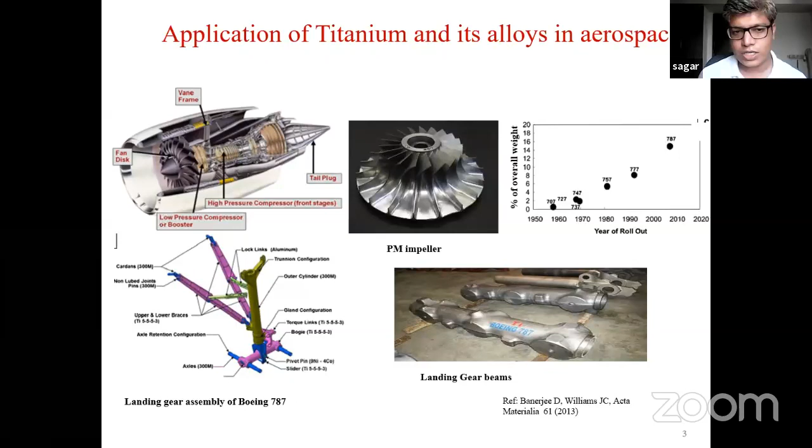Let's move ahead. We've seen why machining is important, so let's see its mechanism, especially in titanium machining, and why it's different from other metal machining. You must have heard about different kinds of chip formation in machining: continuous chips, discontinuous chips, and another category known as segmented chips. For many steel applications, segmented chips form when you subject the machining process to high speed cutting. Whereas for titanium, whether you cut at high speed or low speed, segmented chips will form.

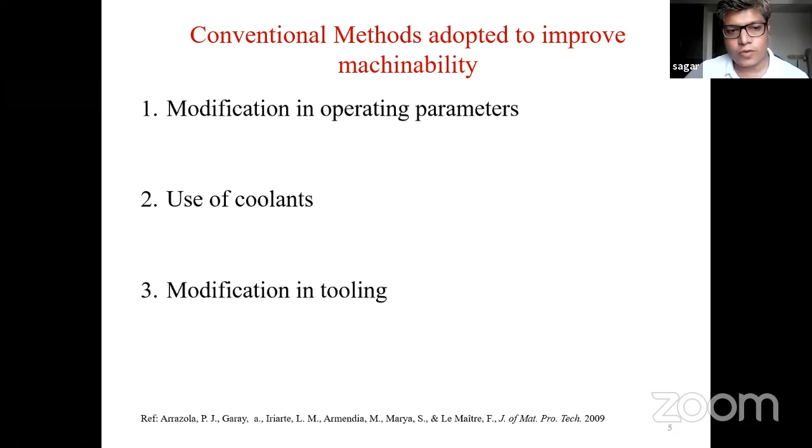So most of the times you could have seen in titanium machining, usually the cutting speeds are limited. We cannot go to the same cutting speed as aluminum or different kinds of steels, keeping apart the high strength steels. That is the main reason why titanium machining is difficult. So many people have tried to address this issue, like modifying the operating parameters, use of coolants, modifying the tool geometry, and all those things.

Modifying operating parameters such as cutting speed, feed, uncut chip thickness, that means the depth of cut, and coolants. So people have used solid lubricants, soluble lubricants, even liquid nitrogen. Then there's another conventional way...

Another conventional way to improve machinability is to use different tool materials and try different coatings. Tool materials could consist of carbide tools, and HSS is always there. Coatings are applied on the tool to make it more strengthened. Then there are changes in tool geometries, like you can give a chip breaker, different rake angles, different relief angles, and all those things. So these are the conventional ways people have tried over here.

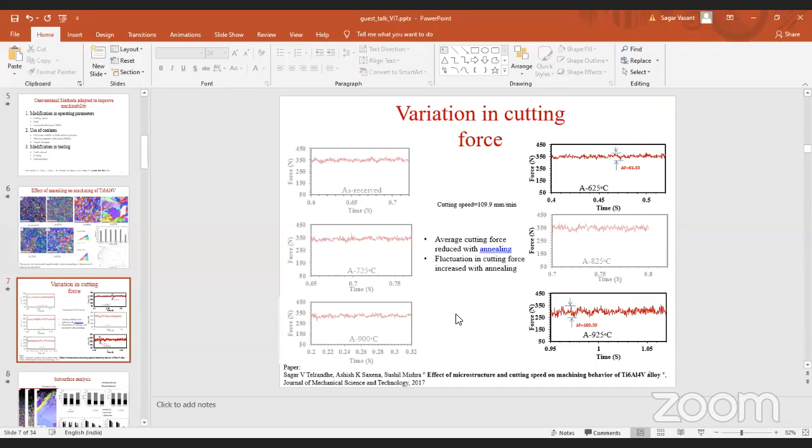Sagar, let us have the interactive session later. Let us see the presentation. Sure, this is how it is organized. Okay, fine, fine.

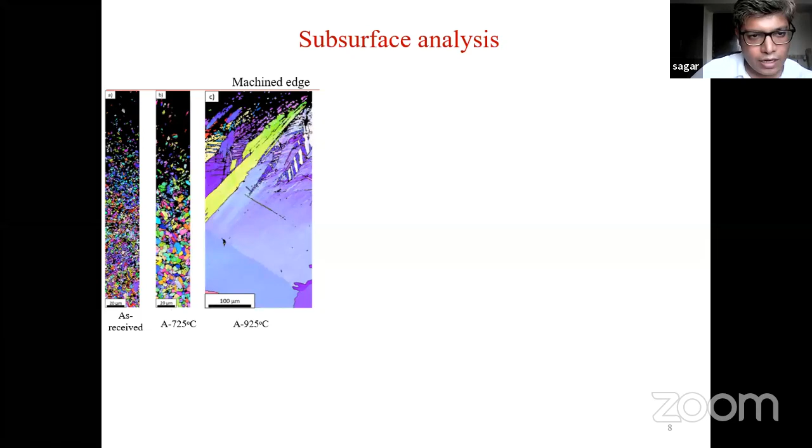So with as-received and at 725 degrees Celsius, we could not see much of those things because there is a highly distorted structure formed. But by this distorted structure, we could see how much is the machining affected zone, meaning due to machining, how much distortion happened at the subsurface level.

So at subsurface level, when you increase the grain size, the depth of machine penetration has been reduced for every cutting speed.

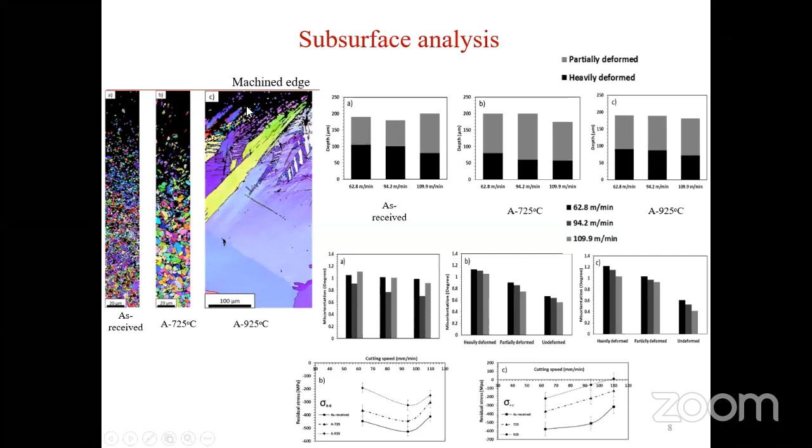And even after that, the residual stresses has been reduced for the highest grain size sample. We have seen that these residual stresses are directly proportional to the cutting forces, so the average cutting forces has reduced over here.

That's because predominantly here the grain size has been increased, and that has reduced the hardness of the sample, and because of which you get the lower average cutting forces. Although you get lower average cutting forces, you still have higher variations in that cutting forces.

So in a way we could say that increasing the grain size could lower the cutting force, meaning it could lower the power consumption also. However, it could increase the variation on the cutting tool. And in case of titanium machining, the cost of machining is driven predominantly by the cutting tool.

So these are the conclusions from this area. I have two more areas to cover. The average cutting force has been reduced, and the compression twins were formed.

So in this region, if you see, these are nothing but the twin formations over here. That means the grain orientation has been mirror image to each other. So between this grain and this grain, there are almost mirror images at some angle. Those are nothing but the twin formations.

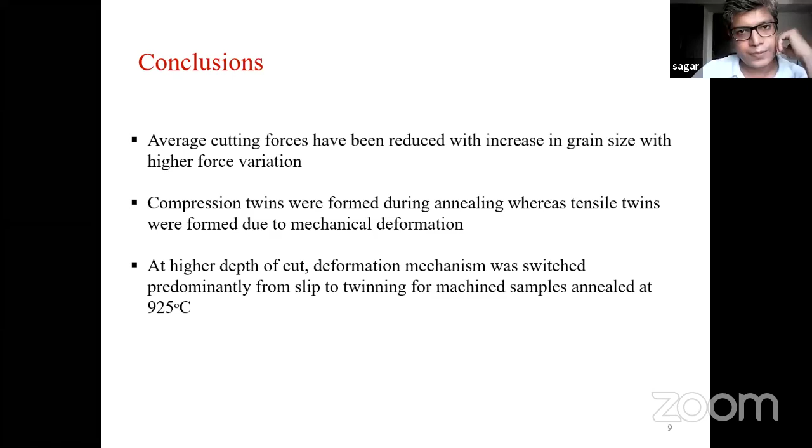So next, I have gone through the surface modification with laser treatment. The reason to do that is, I have seen at lower grain size, the cutting force variation was quite lower. This happens because of grain strengthening, a kind of mechanism that happens inside in metallurgy.

If you see at the micro level, we thought that with laser surface modification, we can reduce the grain size even below what we got at the 625 degrees Celsius annealed sample.

So what we did, we took the cylindrical sample and laser treated it. We calculated the depth of penetration, and accordingly we decided what should be our laser parameters, so that we should be able to machine the surface which has got microstructure modification.

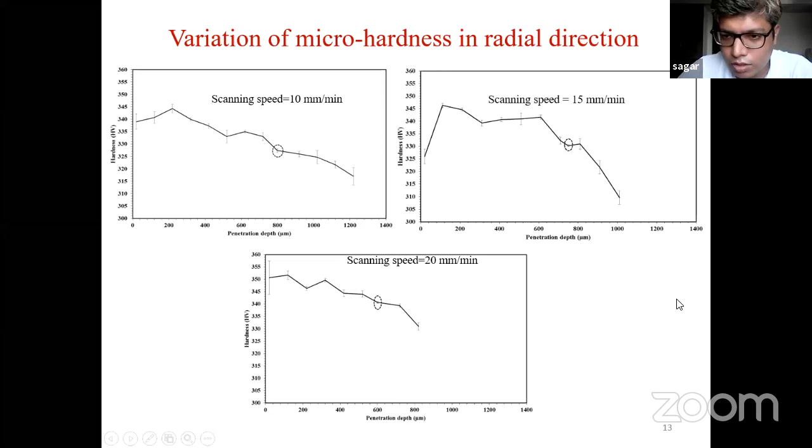Initially the laser treatment affects the whole grain structure, but when it goes near the base material, it affects only the grain boundaries. This is because the grain boundaries are nothing but the weakest section inside the grain structure, so they have very high energy to shift.

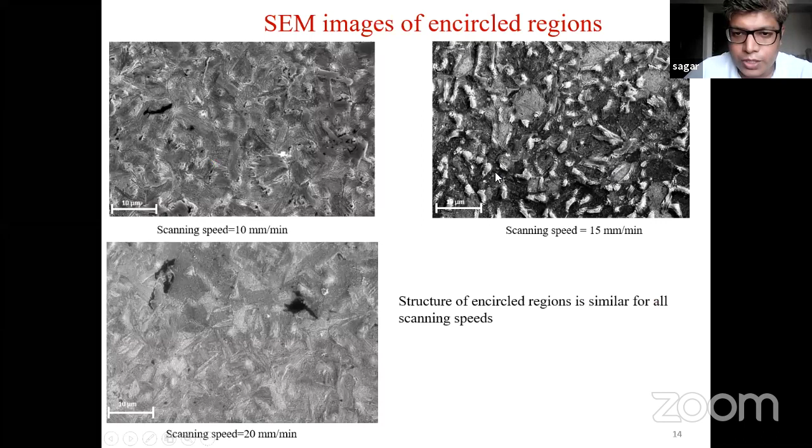Like earlier, we have seen this kind of boundary formation, which we could not index in the EBSD scans. That might be due to many reasons, like new phase formation.

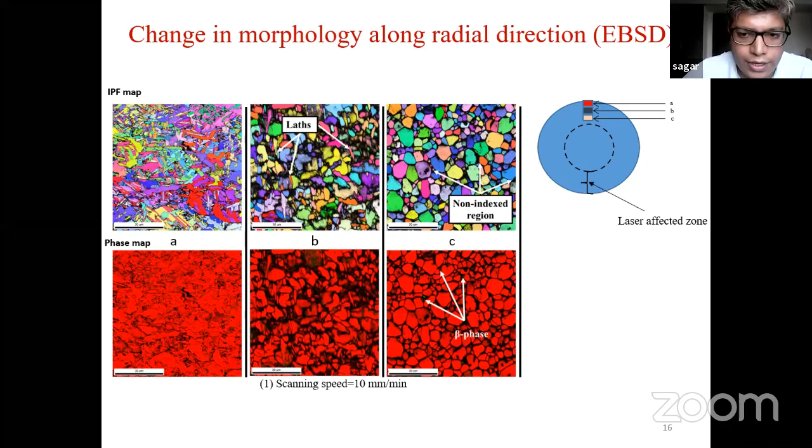Well, there is a heavy distortion of the material where EBSD scans have not been able to index. Okay, so these are the few things that could have happened over here. And here we could see some of the beta phase formation. Okay, let's go ahead. So near the edge there is recrystallization. These are the partial conclusions of this. And for every scanning speed we could see the same effect. For the third scanning speed also there is the same effect.

However, we could see that for the third scanning speed the beta phase along the grain boundaries has increased. That has increased because we have given enough laser power and laser scanning speed that was sufficient to convert this boundary into beta phase. So that's what happens when you do annealing and you go beyond the beta transus temperature. First of all, beta phase starts to form at grain boundaries, then it will start to form everywhere else.

So that's what has started over here. But the laser power as well as scanning speed was not sufficient for this formation to go beyond. That's why it is restricted to this region itself. To investigate more, we could see some black lines over here; why could we still not index that even with EBSD? For that there could be one reason: there is twin formation. That means at the boundaries over here, annealing twins have been formed.

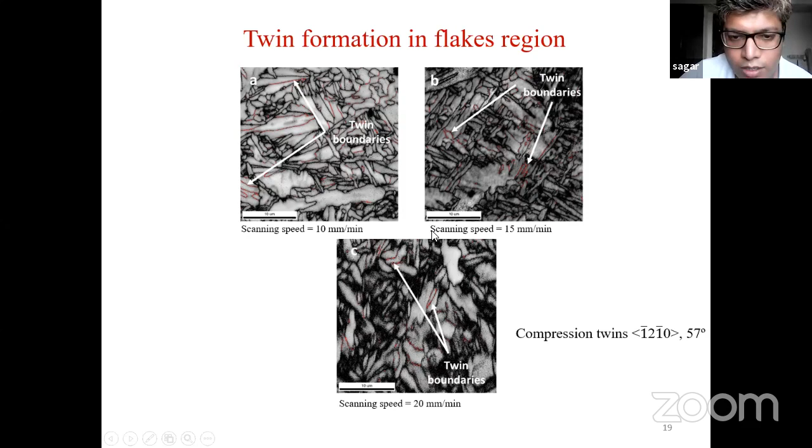Earlier in the first part of this presentation we saw twin formation due to machining. Those are called machining twins, or mechanical twins. Here, when temperature is the driving force for the formation of the twins, these are called annealing twins. However, both have a compression nature. So let's go ahead with the TEM analysis of those regions. You could see in earlier slides there were many black points in the EBSD scan, mostly in the laser affected zone, where the laser affected the material drastically. So we did the TEM analysis of this.

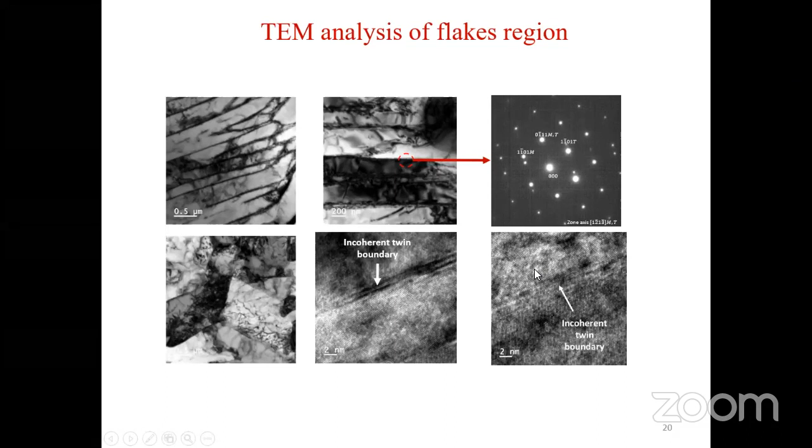These are nothing but the twins. Let's see. Here also, with TEM analysis, we were able to find twin formation. The twins we could see in the EBSD analysis are reflected over here. So even at the atomic level you could see the twin formation. Then at the grain boundaries, here also you could see many non-indexed points. Those formed due to some other structures. Some of them formed a BCC structure and some of them formed an orthorhombic structure.

The orthorhombic structure in titanium is nothing but what we call alpha double prime, which forms when you do annealing followed by quenching, meaning you are suddenly cooling the material. That is when this orthorhombic structure could form, and this orthorhombic structure has not been indexed in the EBSD scan. Here also you could see this kind of structure. This TEM structure shows there are heavy deformations inside the material, and this deformation happened due to the laser treatment.

What happens in laser treatment is that heat is supplied locally at a point, and the other points act as a sink. So the layer just below the laser treatment will try to expand and other layers will try to arrest that expansion. That causes deformation inside the material, and those are nothing but localized deformations, which are clearly visible in the TEM analysis. Fine.

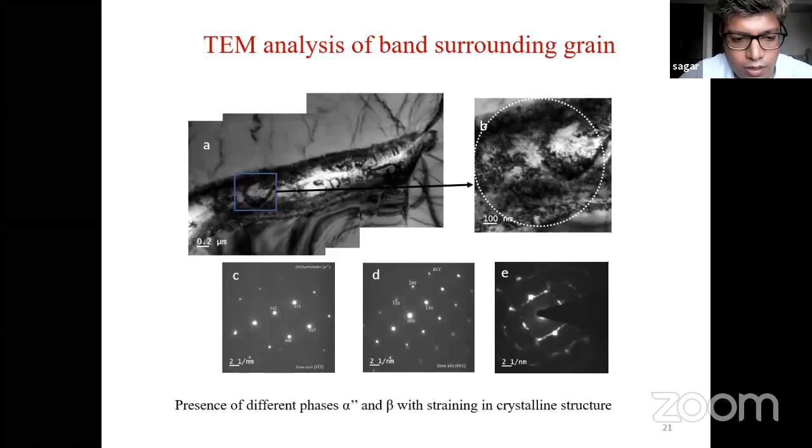So the reduction in segmentation ratio indicates that the plastic deformation happening on the rake surface has been reduced. So when the plastic deformation is reduced, that means the heat carried by that plastic deformation, which is considered as loss, that loss has been reduced. Okay, so after that,

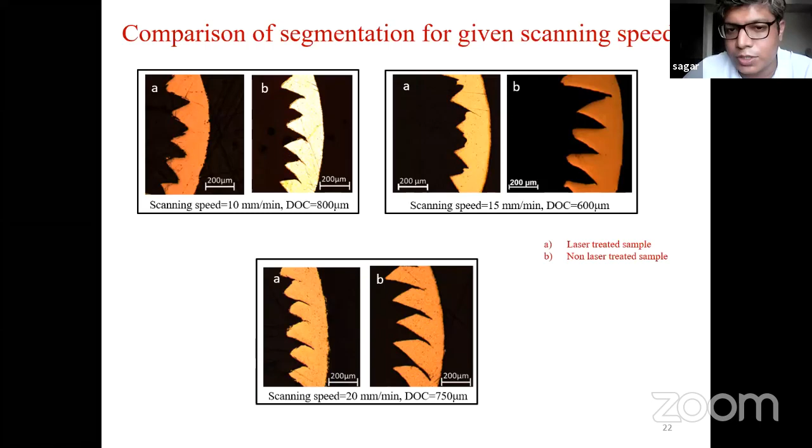once the loss has been reduced, that's how the force variation also has been reduced. Once the force variation is reduced, you will get lesser vibration on the cutting tool. Thereby you could improve the tool life and you could improve the machinability of that material. Okay, yeah, so this was the crux of it, right?

So here you could see, and let's see what exactly is happening in the shear band, why these shear bands are not getting localized. Okay, so what is happening over here is, yeah, here you could see when you machine the non-laser treated samples, there is a localized shear band formation.

Whereas in the laser treated samples, since the grain size is quite smaller and even the hardness is quite higher in this region, there is a grain boundary strengthening effect we could see. So that means the localized plastic deformation has dispersed over the larger area, so that has reduced the force variation. So this is visible in every other case too.

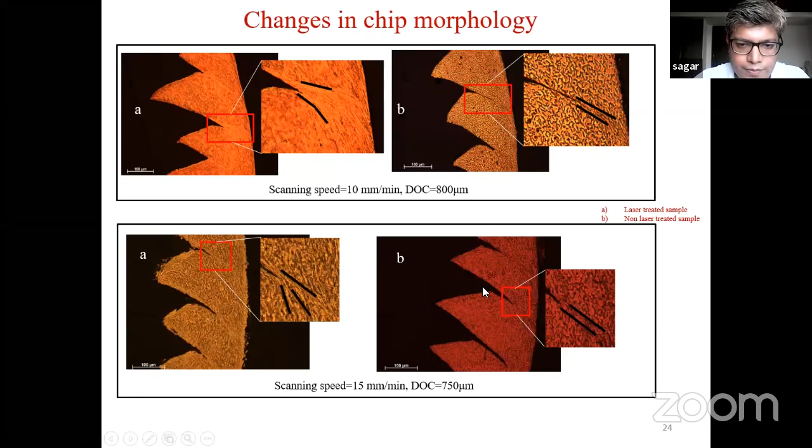Yeah. So these are the conclusions from this. The flakes dominant region is harder as compared to the combined flakes region, followed by the grain boundaries on the bands. Then we have seen that the twins formed were compression twins. And higher hardness and flakes structure resisted the formation of localized shear band. So the third conclusion is the main conclusion of this study.

Okay, so after that, what we did is, let us say if you want to do machining or a simple turning, I want to know what should be my depth of cut if I do the laser treatment of that sample. Or in a reverse way, you could say this is my depth of cut, so what should be my power and scanning speed to do the laser treatment, so that the improved machinability would come in handy in use.

So this is the predictive way we have achieved what should be the scanning speed and what should be the power, and given scanning speed and power, we could see how much depth of cut we could come up with, and that depth of cut should be subjected to machining. So here what we are doing is nothing but predicting the laser affected zone, or the depth at which the laser has been able to modify the microstructure.

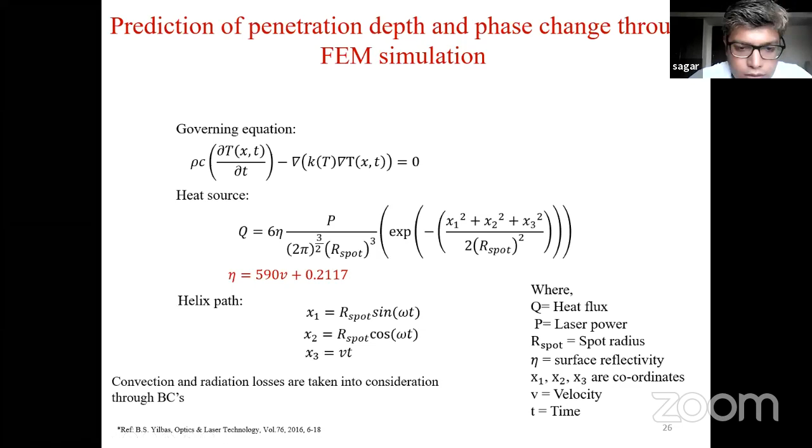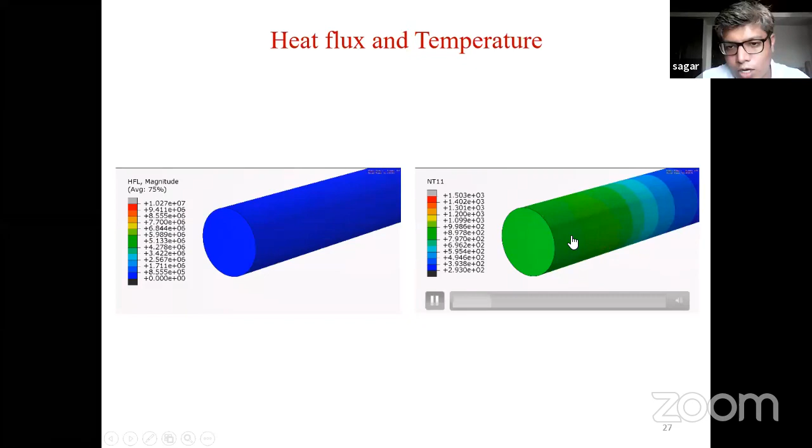Then we have established one more relationship of absorptivity, sorry, reflectivity with respect to the scanning speed. Okay, let's go ahead with what we have seen. So we performed the laser treatment simulation. Here you could see the heat flux, and because of that heat flux, how the temperature gradient has been formed. And here also we have kept the parameters similar to the experiment which we performed. So we have kept the overlap as 70%.

So what we did after that is we took into account the thermal profiles. What we have seen is that the depth of penetration is already decided by the beta transus region. So the beta transus temperature governs the surface modification. That means when the laser penetrates and the power is not sufficient to cross the beta transus temperature, your material will not see a drastic change in microstructure in case of titanium alloys.

So when it goes beyond the beta transus temperature, that's the region where the whole microstructure will get affected. Here in titanium, the beta transus is around 1300 kelvins, or near to 1000 degrees Celsius. So with this simulation, we tried to see how much thermal gradient is formed beyond the beta transus region, and based on that, we decided the penetration depth. Here you could see the experimental and numerical penetration depths are quite comparable with each other.

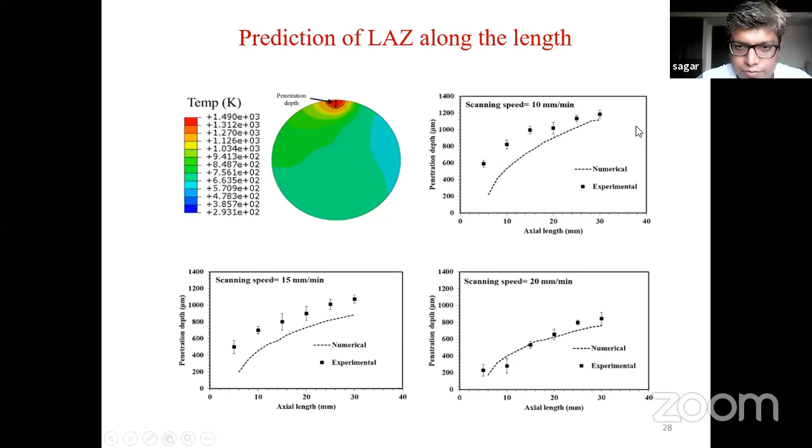Next thing is the phase analysis. So with this simulation and with the cooling curves we could also see what could be the different phases formed in the material. So we have seen over here, we have plotted the temperature profile, and with that temperature profile many of the phases could be predicted, like orthorhombic structure, then BCC structure. Those formations were possible. The same has been established through TEM analysis. So this is nothing but the validation of those phase predictions.

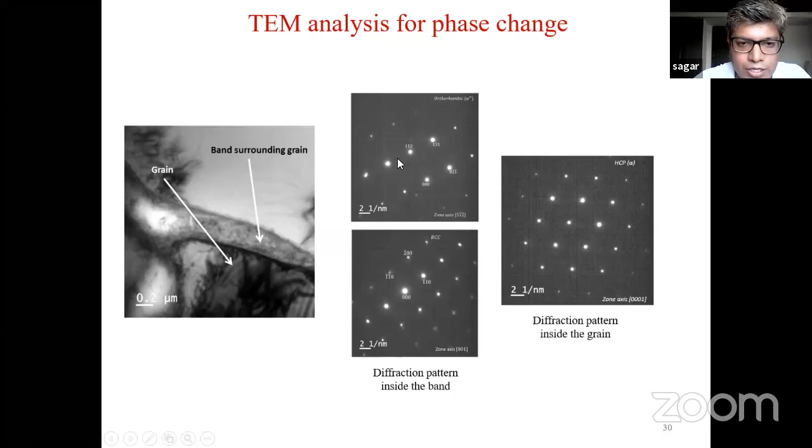After that, what we try to achieve is, let's see, here after giving laser treatment, we could see the penetration depth increases along the laser travel, like we see in the first part of laser treatment, over here. But many times we have to perform machining with constant depth of cut, especially in turning operations. So modifying the structure at constant depth of cut, how could that be modeled?

For that we have defined a polynomial equation: how the power should be changed along the scanning speed, or the power could be changed along the time of laser scanning. Applying the boundary conditions over here, we have come up with this equation. P at x equals 0 will be P minimum, and when it reaches this level, it will be the maximum. After applying these conditions and taking dP/dx at x equal to 1, you could see the slope has almost become constant, meaning after this the laser penetration will become constant.

So at that point the difference of power with respect to the scanning travel will be 0. So to get the constant depth of penetration, we could plug in this polynomial equation and get almost a constant power. Here you could see, by plugging in that polynomial equation, we got the constant depth of penetration.

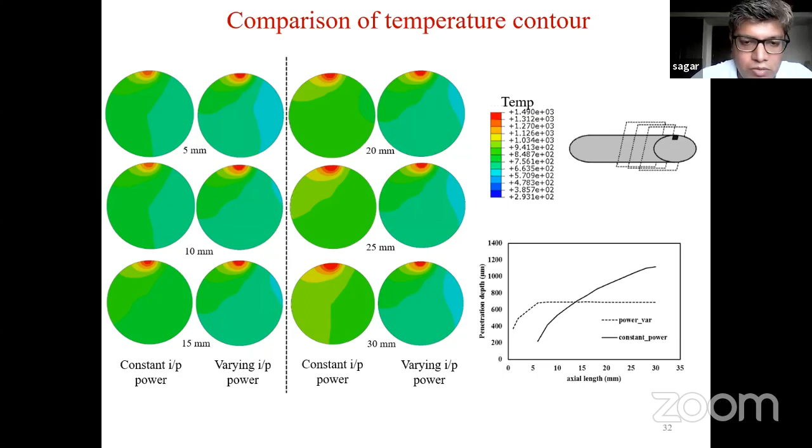If you see these sections, for every cut, the cuts have been made at 5 millimeter, 10 millimeter, 15, 20. At every interval of 5 mm we have got different cuts, and from those cross sections we could see how much the laser depth penetration is affected. So with this model we could get a proper, constant depth of penetration. And with laser treatment we have already seen how the machinability can be increased with reduction in cutting forces. So combining these two, this model has been built up.

So this is the conclusion of the last part. The predicted phase change happened by the time temperature plot. The CCT curve has been validated through TEM analysis. That means whatever phase change we have predicted has been validated through TEM. Twins have been formed. That is due to the rapid quenching mechanism and localized heating, and those twins are nothing but compression twins. Then we have implemented this polynomial input power variation in the FE model to result in uniform distribution of heat penetration along the axis of the cylinder.

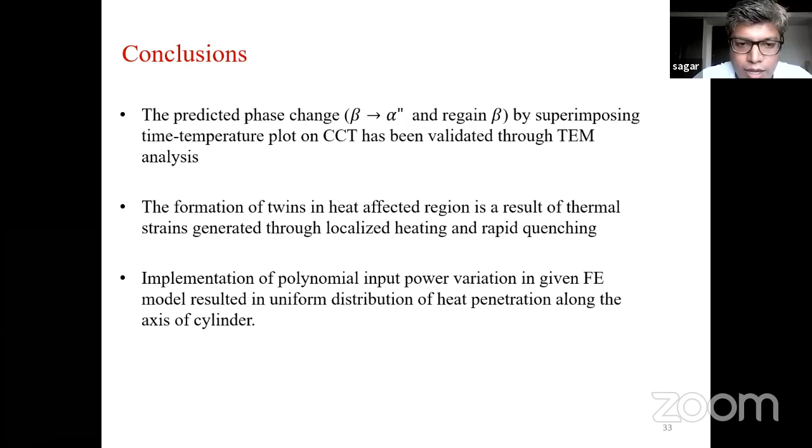So when you get uniform laser penetration, you can decide your depth of cut for machining. With this model, you could get a constant depth of cut, go ahead with your machining, and reduce the cutting tool cost.

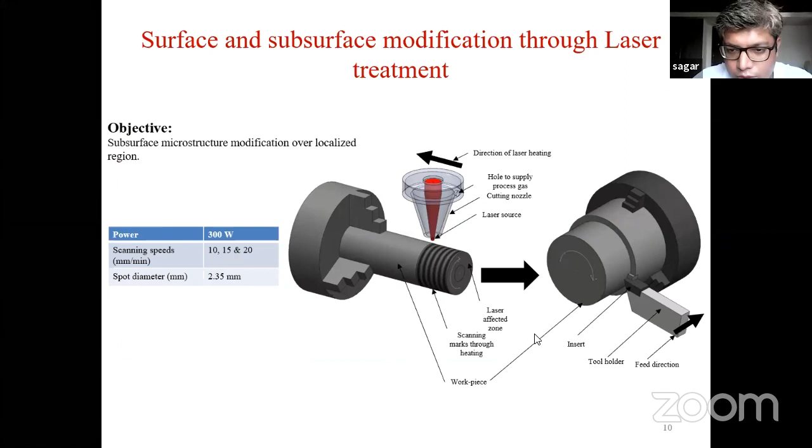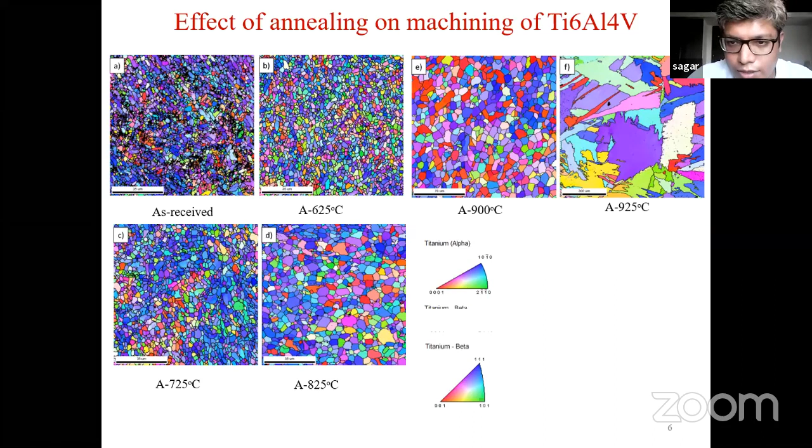Okay, sir. Okay, so what happened over here is, I will put it in one other way also. Here, the depth of cut was almost near to the grain size of the sample. So when you have, let us say, a depth of cut matching this grain size, when you cut this grain, then another grain of similar grain size will come into the picture. So there will be local orientation differences occurring while machining. So that's how the grain size is affecting the machining.

Whereas over here, in this annealed condition, the depth of cut is far more than the average grain size. So that's why grain size has no effect while machining this lower grain size sample. But when your depth of cut is comparable with the grain size, yes, it will have an effect.

Okay, sir. Sir, Ajay has a question: what are your views on deformation of high-speed titanium turbine blades, and do you have any comments on the failure of Kaveri engine blades? Oh, it seems hard to comment on that. Well, Kaveri engine turbine blades, actually turbine blades are not made of titanium. They are made of a single crystal, a high-strength Inconel kind of material, which has very high strength and is not chemically reactive at high temperature. Whereas titanium is highly reactive at high temperature. You could not use that in turbine blades.

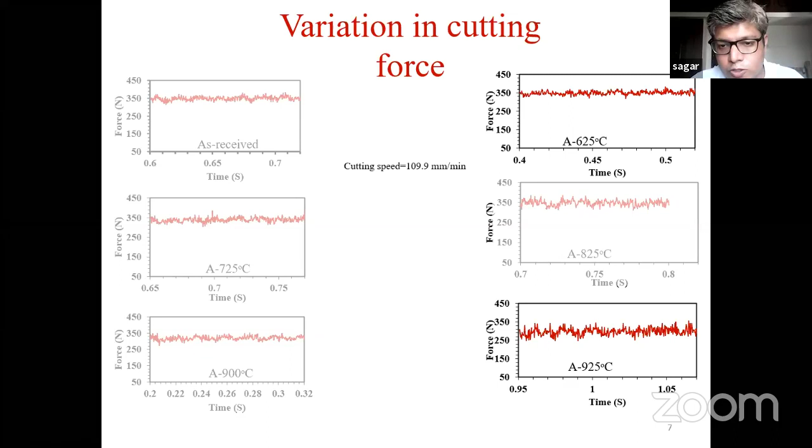It's the conventional way of measuring cutting forces, with a dynamometer - a quartz type dynamometer. There is a quartz crystal inside the dynamometer, and when it's subjected to any forces, its resistance changes, and that transforms into a signal, which gives output in voltage format. Then there is NI software which converts the voltage into newtons - so there's a volt to newton conversion. That's how you get the cutting forces. If you want to study this in depth, you can look into the types of dynamometers people use to predict cutting forces in machining - it is the quartz type dynamometer.

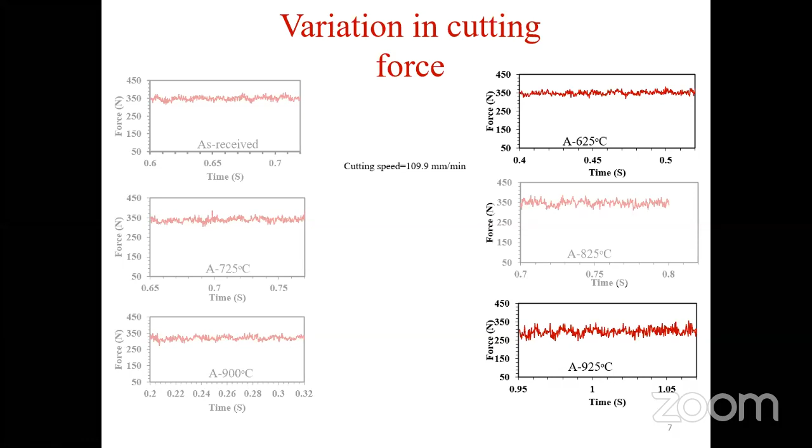First of all, thank you for accepting the offer and the invitation and delivering this to the participants. I understand these three parts, the different parts of work you have presented, all extensive, time-consuming experimental work. I know how painful it is doing TEM and EBSD for titanium alloys. I really appreciate it, and phase change is also very important - we need to understand, is this a good thing or bad thing? This phase - for example, in the material I worked on extensively, phase change is always a controversial topic now, even though the topic has been open for more than 300 years.

So this phase change is why we need advanced characterization tools, making use of this - and you have done EBSD and TEM. The reason this topic is relevant here is, whenever we are on the mission of product development, whenever we are part of the team - students, faculty members, or research scholars at large - we know nothing is superior, nothing is inferior, and we need to understand this material behavior completely. Then only, as stakeholders and team members, we need to study, if not master, at least these kinds of things - that's very important. One of the main reasons is product development management. Students should have knowledge of both technical and materials and manufacturing, simulation, and all these things - we need 4 or 5 different phases, multifaceted. Only then will you be a successful product development engineer.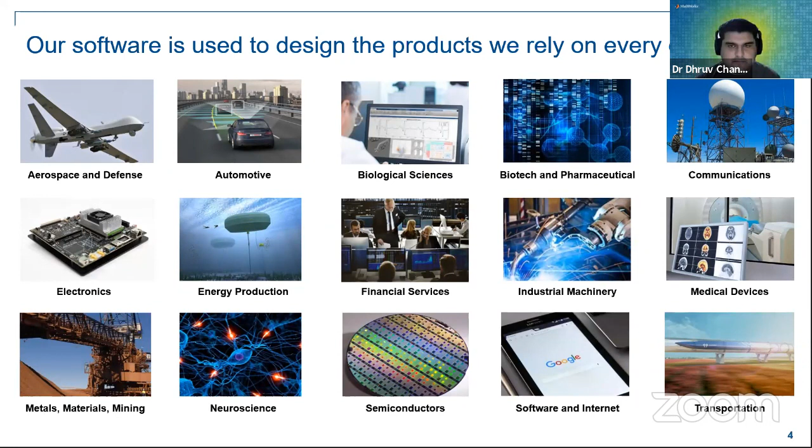And these tools are not just useful for academia, but they're widely used across industries. Especially aerospace and automotive industries use these tools heavily. All the methods that we're going to talk about today are very heavily used in most of the safety critical applications that you will run across. I'm from an energy production background, I'll tell you what I used to do. But also if you're working in the area of communications or medical devices or metals, materials, mining, any of these areas, it's quite likely you'll run into these tools somewhere.

Just to give you an idea, I won't talk about all of this, but the same methods that we're going to talk about today and the same tools are used by all of the top 10 auto manufacturers and all of the top 10 aerospace companies in the world. So this is something which is very relevant to industrial applications. And learning this might be a very good way for you to find your future work in research or in higher studies or in industry, wherever you choose to go, if you are an engineer or scientist. So a little bit about me, as they very kindly mentioned, I have a master's and PhD in mechanical engineering.

This is a wave energy device. It was a paddle, basically a U-shaped paddle put in the water, made of carbon fiber reinforced polymers, CFRPs. The idea is that this thing would oscillate back and forth with the waves, and the motion could be used to run a small turbine. From that turbine, we could generate electricity.

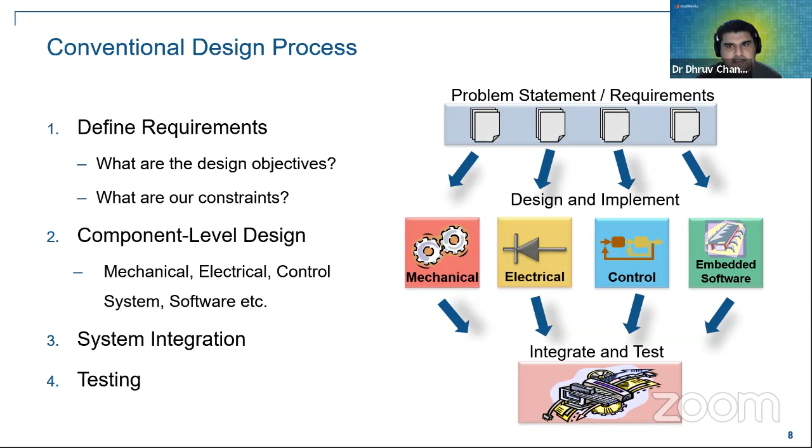So what's the problem? First of all, if we just come up with certain requirements and design specifications on pieces of paper or on whiteboards, it is very easy to misinterpret these things. And it's very difficult to analyze what these actually mean in terms of the system-wide implementation. It's difficult to manage these requirements as they change as well.

Because suppose you started out to do one thing, your requirements changed over time — maybe the market shifts, maybe the technology changes through the design process, maybe anything happens — and you may have to go back and change what you were working on. It's a very common thing in industry. So it is difficult to go back to your original files and try to figure out what changes to make now.

Another part is the physical prototypes you have to build. If you have to build a car or an airplane or whatever, it is very expensive to build these kinds of things. You have to buy a lot of material, you have to have technicians involved in making these things. It costs a lot of money and takes a lot of time. So you cannot iterate your designs rapidly.

And there is no system level testing. There's no concept of system level testing because, as you can see, there are barriers between the mechanical, the electrical, and the control people. These are all people from different departments. Sometimes they talk to each other, sometimes they don't. The communication is certainly not perfect.

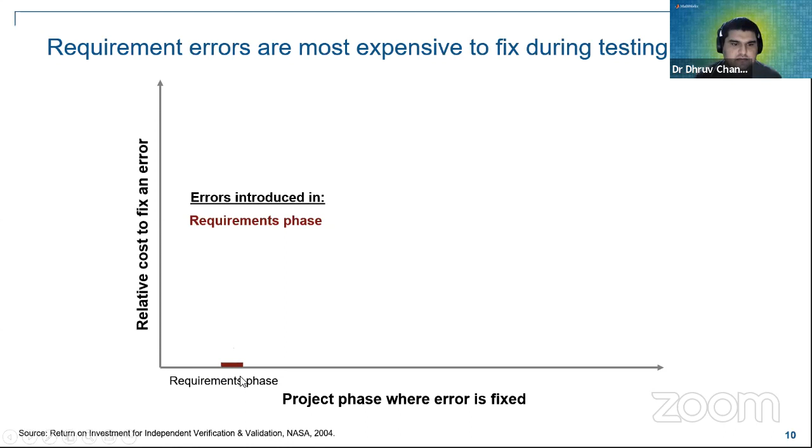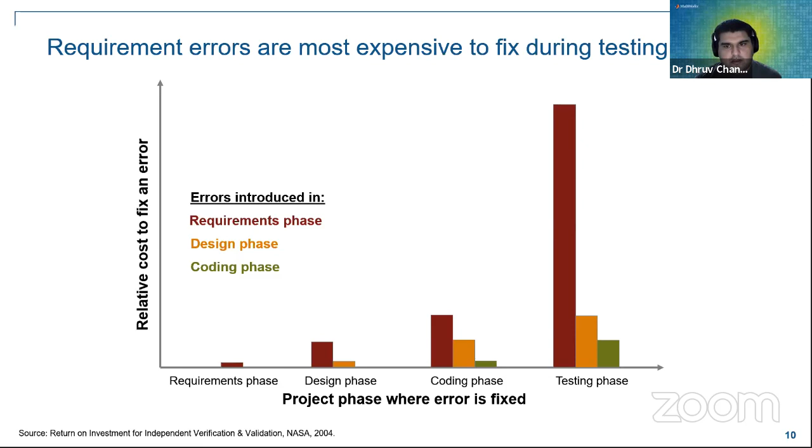So model-based design is a workflow or process which was invented by the German automotive industry in the 1980s, along with MathWorks. So MathWorks was a big pioneer in that. This was adopted by the aerospace industry, and now many other industries, the medical devices industry, and all those other pictures I showed you, they are all starting to use these processes. Now, model-based design can help in preventing this. This is that big red spike where you make a mistake at the beginning and you catch it at the end, and it ruins all your work.

Okay. The way this works is, we first have requirements and specifications. So this does not change. But immediately, as soon as we have our requirements, we spend a little bit of time building a multi-domain simulation model. This will include some control systems, some electrical, mechanical components, and a little bit of software as well. This does not have to be a detailed model. It can be just a rough model, a rough outline, maybe even just a few equations.

And immediately, as soon as you make the model, by model we mean mathematical model, we compare it against the requirements. And immediately we check if our requirements are sensible, and this can help us produce better designs.

So suppose your boss or your client comes up to you one day and says, I need a diesel car which can go 40 kilometers per liter. So you can't just say no to him. Okay, that's not good engineering. That's also lazy in one way. But what you can do is you can ask him, how many people is the car going to carry? What kind of road is it going to drive on? Yeah. If it's just driving on a highway with one person, which is almost like a motorcycle, you might be able to get that mileage.

So you have to capture these requirements in the beginning, and you check if the mechanical and the electrical and all these systems make sense. You may only have a few of these systems, you may not have all of them, or you might have more things. You might add materials here, you might add chemical systems here. But the point is you capture this information right at the beginning, and right from the start, you start cross-checking between these things. Is the design making sense, and are our requirements sensible?

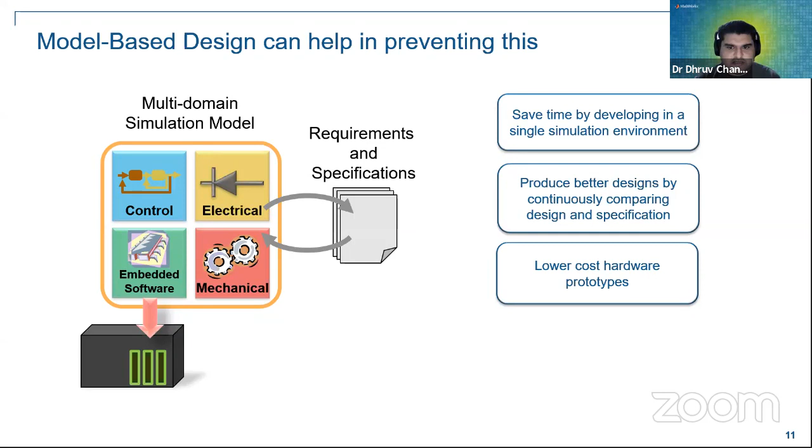And then those 20 designs, we did a detailed simulation of how the wave interacts with the structure. Is my carbon fiber structure strong enough? Are my motors turning fast enough to generate current? All these things. And from that, we were able to select one or two good designs, which we eventually manufactured. So the cost of your hardware prototypes falls.

And because you're simulating things, you can catch errors very early on. So if you had any mistakes in your requirement or your design, you can catch them very early on in the process. And of course, everything is integrated. So your electrical circuit will be of the right size for your mechanical system. Your materials will be of the right configuration. Your control strategy will take all this into account because you have been simulating all of this in a single mathematical model. Okay. So this is the model-based design process.

And what we'll do in the next 45 minutes or so is we'll look at the steps of how these things are actually done. We'll look at it step by step. Right. So the workflow looks something like this. This is called a V-shaped process. And I'll tell you what this is. So the first arm of the V is called the design phase. And in the design phase, we start from the top level system and then we start going into more and more detail as we go along the design.

Okay. So first we define the requirements of our system. Then we make a system level specification or a system level model. Then we do the subsystem design. So after we have the entire system, then we'll go and look at the individual components, the electronics, the mechanical, all these things. And then finally, after doing these three top level processes, we go to the implementation stage, which is where you actually start investing money into this. Before this, you are just doing programming.

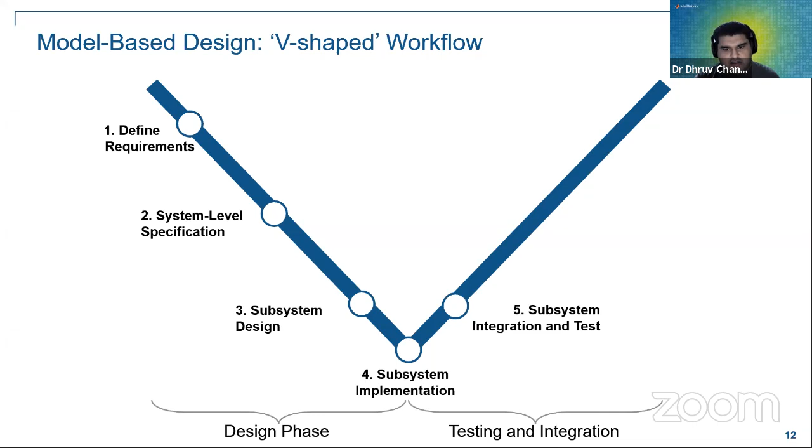After this, the second arm of the V comes in, which is the testing and integration phase. Some people call this the validation verification phase. Now, after you have made your designs for all of your subsystems, the mechanical, the electrical, the control, all of these, you check them at the bottom itself against the subsystem designs. So if you designed a mechanical component, you designed an electrical component, you have the control system, you put all of them together in simulation, and you check if they all are working with each other, if they are all the right size and shape, and they basically match.

Next, you do the system level connections. So now you put together different subsystems into the whole system and you check if everything is working properly. And finally, you can complete your integration and then deploy your device. So basically, you start from the high level, you go down into the details, and as you're coming up the other side of the V, you keep on checking every piece of your work.

So this process is called a continuous verification validation process, and this is what is being used by all of the safety critical industries today. I think at least most of them. Of course, at the end, if you've done all these steps, you can realize this is much more complex than just building a CAD model, because the CAD model is just this piece, right? Many of you are mechanical engineers, you know what working with CAD models is.

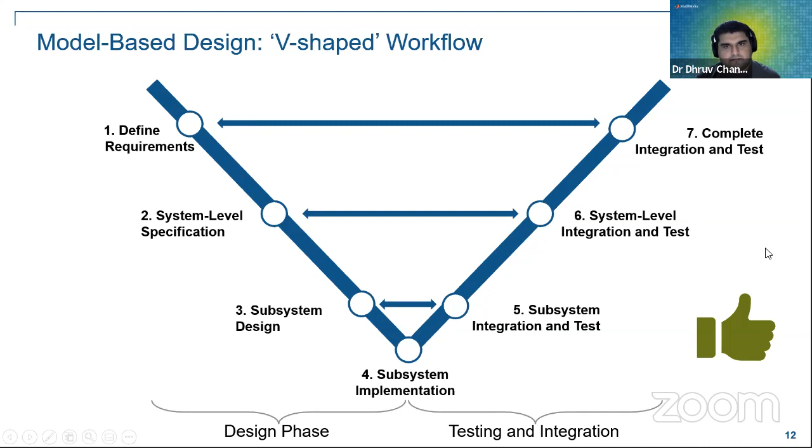So this is the CAD model here. This is the physical prototyping here. But what you've done is you've added many more steps. So there's a little bit more work. But after this, you can be sure that your design is going to work, or you can be more confident that your design is going to work. So let's look at some industry examples of where this is used. After that, I will show you just like a rough outline of how we can do this for a car.

So this is an autonomous aircraft. The company is called Aurora. This is the Centaur aircraft. It's an autonomous aircraft, and this basically can fly itself without a pilot. So let me pause here for 1 second. Now, if you think about this aircraft, there are so many interacting systems here, right? You have all of the mechanical parts of this plane. So you have the propeller, you have the engine, you have the flaps and the ailerons and all the control surfaces here, the elevators, etc.

Think about the materials engineering and the mechanical design of each of these gears. It depends on the total weight. This aircraft will also have some batteries, some navigation, some radar in the nose, some communications equipment. All of that has to work together. There is a control system inside the cockpit, so you'll see it moving in a second. So if you look inside the cockpit view, there will be like a joystick moving and controlling all of these systems. So all of this instrumentation has to take readings from the engine, and then the movement of these joysticks will change how the aircraft is behaving.

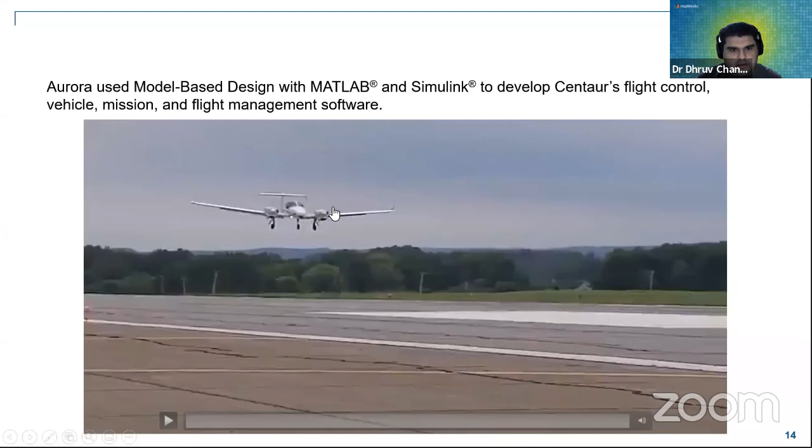All of this has to be connected together, so that's the electronics part. And because this is flying autonomously, there is obviously going to be some software there for the artificial intelligence. So they simulated this entire aircraft first using model-based design, and they were able to get basically their first prototype working. So imagine you had to build 100 of these aircraft. It would be very expensive. If something crashes, it's very dangerous because airports are typically in populated areas. But because they followed the whole process, they were able to get this working the first time, flying safely, and you can see the actual prototype there.

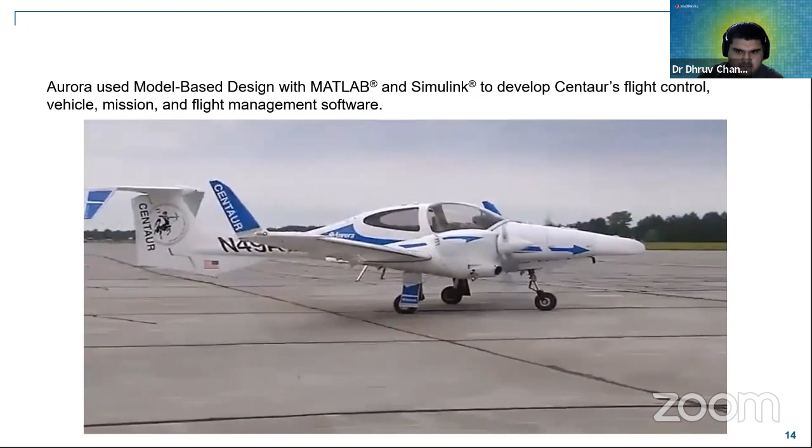Another design, this is from an Indian startup called Ather Energy. I believe they were incubated in IIT Madras, if I'm not mistaken. So what they were trying to do is design India's first intelligent electric scooter. And if you see the quote, they say, we had lots of promising ideas, but as a small startup, we did not have the time, money, or people to build prototypes to test each one. So with model-based design, we identified and validated the best ideas through simulation, making it possible to deliver a full-featured scooter in less time. Now, they basically were able to reduce their testing time by 50%.

What I want you to think about is the complexity of this scooter, right? You have the mechanical design, obviously. You have the placement of the wheels. That will affect how much force is going through the spring. If the wheels are designed properly, the forces going through this suspension might be smaller, so you can get away with using cheaper materials.

This is an electric scooter, so obviously it will have a battery pack inside this place. It will have some charging system, some microcontrollers to control the charging circuit. If you can model how fast the scooter is going to be ridden through what conditions, you can choose the materials in all of these surfaces such that they can dissipate the heat from the batteries properly, so there is no danger of catching fire.

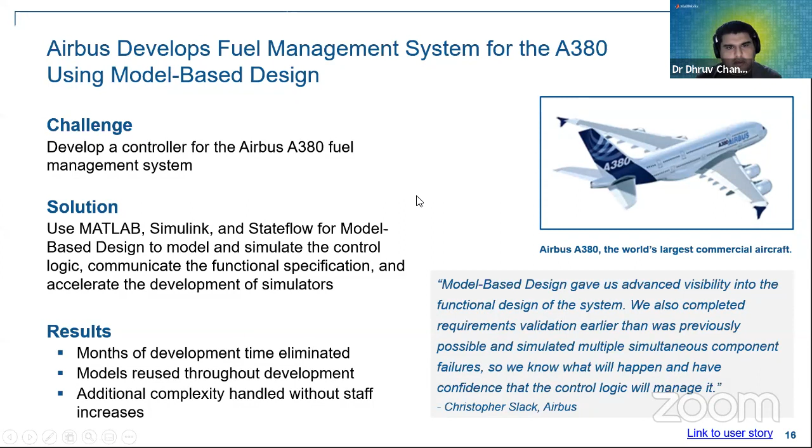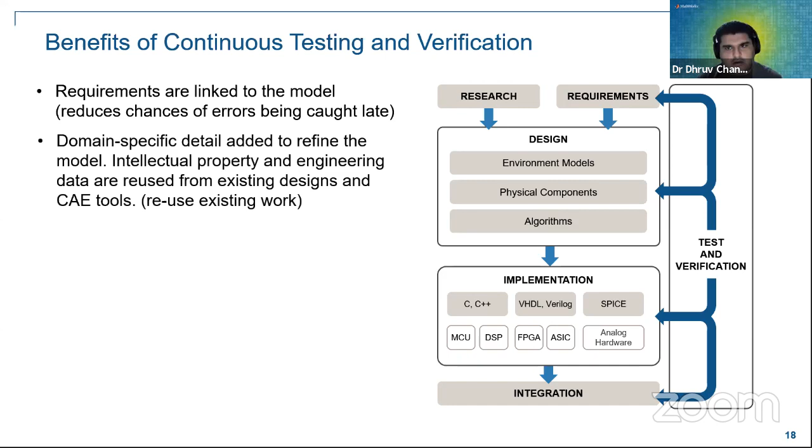Okay, so why are these industry use cases successful? Basically, there is some benefit to continuous testing and validation. That's the core idea that we're trying to get across here. So the requirements are linked to the model. You have some requirements you start out with, and based on these requirements, you create some models. So these include models of the environment: what is the temperature, the pressure, the vibration, all these things.

You can design your physical components. So let's say you have made some mechanical design in a CAD software. You can import it here. Let's say you have done some analysis in a software like OpenFOAM or ANSYS or whatever you're using. You can take those inputs and you can put them into your simulation model for designing. You can also check if your algorithms are properly done.

And at every stage, as you're going through this process, top to bottom, you're continuously doing test and verification. You're comparing if your design meets the requirements. So you also check if your controller is working properly.

And then in the implementation phase, what model-based design proposes or supports or recommends is that the code which is coming out of this, so C++ code for your microcontrollers or VHDL, Verilog codes for your FPGAs or ASICs, or code for your PLCs, etc., this should not be handwritten, but it should be automatically generated from your model.

So basically, when people are writing manual code, there is a chance of having errors, and there is a lot of replication of work. So in the ideal model-based design workflow, based on this design that you do here, the code should be automatically generated. I can talk a little bit more about this in the end.

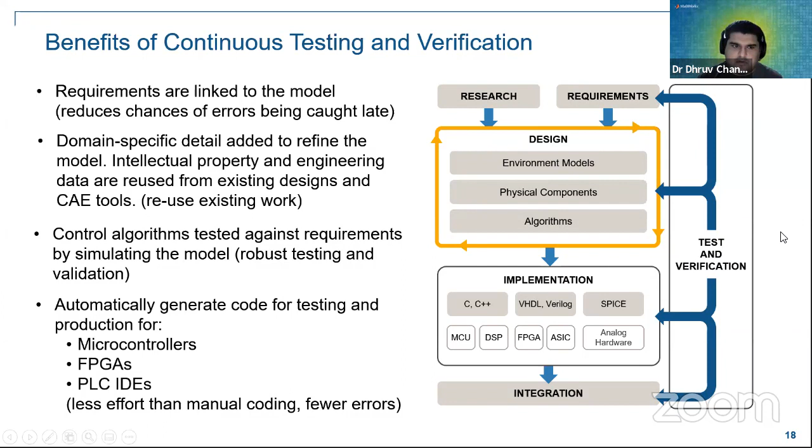So I hope that helps. You can check in some management books, they might have more models. I'm not aware of any that are this successful.

Okay, so now that we have some idea of model-based design, where to get started? You can start off with, first of all, learning how MATLAB, Simulink, and Stateflow work. These are tools which are built to help you design complex and robust software without having to handwrite a lot of code. So MATLAB is a language for technical computation.

I'll share the resources where it can be learned. And then a third tool is called Stateflow, which is used for modeling state transition diagrams. So if you're working with control systems logic, where you have different kinds of operations, different kinds of states, Stateflow is a tool which is very popular for this. It is used to model how the control logic flows. And all of this can be automatically generated to C++ code.

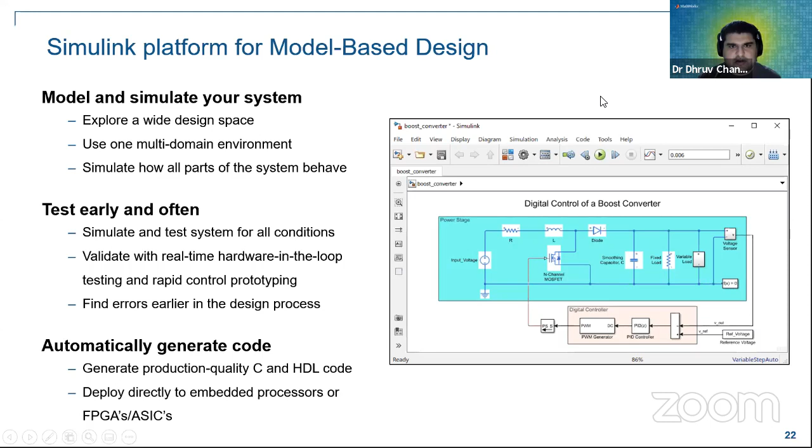So this would be the good place to get started. Let me show you how this actually works. Let's say if you want to design a car or something like that - what the process looks like.

Okay, so suppose that we want to develop a hybrid electric car. We will use the V-shape model, and we'll talk about how all of the steps for that car can be done. So the first thing is we'll define requirements. We'll look at system level specification, subsystem design, implementation, and then we'll look at what is done in the testing phase.

Now, this is a very complex system because you've got sensors, mechanical, electrical, wheels, driver profile, engines, controls, and so on. There is a lot of complexity here. But following this process, it is possible to manage this complexity and basically be successful when working with this kind of system.

Okay, so there are 7 steps. First step, you have to define your requirements. And you have to do this as early in the development process as possible to find the errors in time.

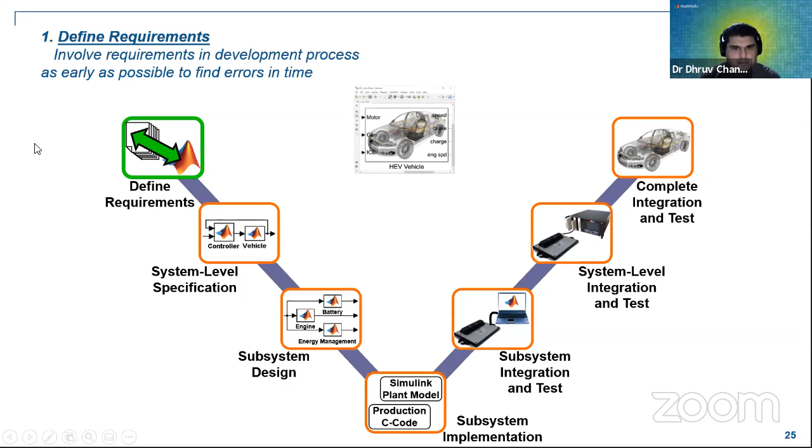So let's say you have a hybrid electrical vehicle model. The first thing you will do is specify your requirements - what is it that I actually want to do? And you will make the model based on those requirements. So maybe I want to convert this existing car into a hybrid electric car. And after that, we will define what each part of the subsystems do.

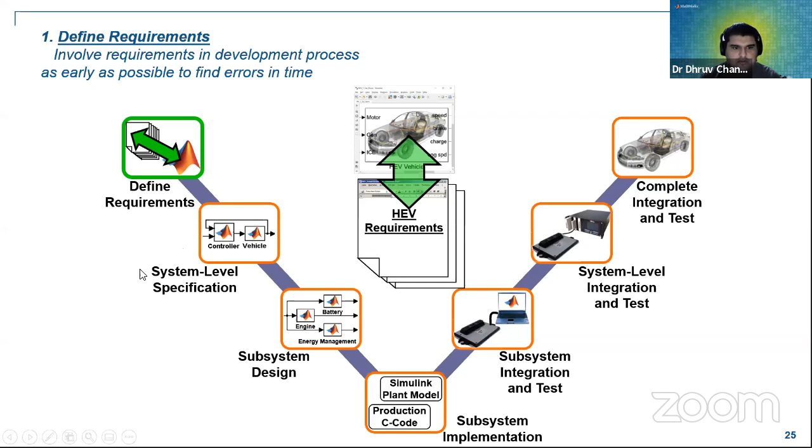So now at the system level specification, maybe what we want to do is develop a control system which will get my wheel to within 5% of the specified speed in less than half a second. So this means, for example, if you enable cruise control on a highway...

We don't do that much in India, but outside this is very common. So you can specify, let's say 60 kilometers per hour on your cruise control. Your car will go up to that speed and keep on driving at that speed until it detects some obstacle or some change. This is very commonly used while driving on highways there. As autonomous cars start coming into the Indian market, we'll start seeing more of this, so you guys should be training for the future. These are the kinds of problems you will run across.

Now, if the wheel has to get within this speed, we will have to look at the speed at which this car is currently driving. We would have to have a model of the braking system, of the batteries to estimate the state of charge, and a model of the engine.

We may want to understand what is the interaction between the road and the rubber surface of my tire. So that might be in the form of a lookup table or a 2D graph which you can pull data from, because the properties of your material will change, and that will affect how your car is driving at different speeds, different temperatures, etc. And basically, because you have specified what I want to get to, now you can go to the subsystem level and start designing out each part of this.

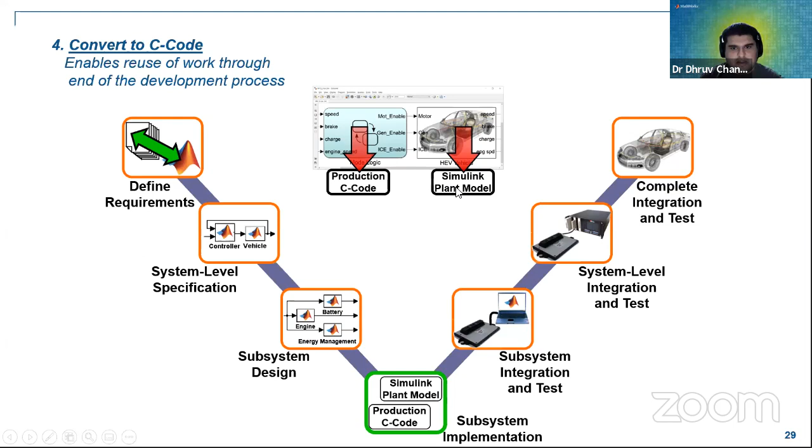After we do this, then comes the software part. Typically it hands over more to the software side of things. From your model, you generate the C code for your controller, and your Simulink model becomes a plant model. Plant is what we use in control systems.

And we do things like processor in the loop testing. So whatever code you have generated, you actually put it on a piece of real hardware, and you see what effect it has had on your memory limitations, on your code optimization. Are your variables being converted properly? Are they of the right type? Are there any problems with sign changes, units, etc.? So all these things are tested. This is called PIL testing.

And then after that, you can also do HIL testing, hardware in the loop testing. Basically, you take your controller and you put it in a real vehicle or some subsystem of the vehicle, and then you run your real controller with that real hardware, and that will allow you to check your system is doing what it should be doing. Maybe you've seen certain examples of this.

I'm sure as materials engineers, you will have seen those testing machines in your labs which do the stress strain analysis and these type of things. So what you might do, if you're an advanced user, you will have a profile of what kind of loads are being experienced on your real system. You will take those loads and feed them as force inputs into one of those testing machines, and you will see the outputs of how your material is responding. That is one example of hardware in the loop testing.

You can also have your engine in the loop. You can have your tires. You can have your battery management system. You basically test out each part of this. And then at the end, you put these together and do the complete system level testing. This is called the integration testing.

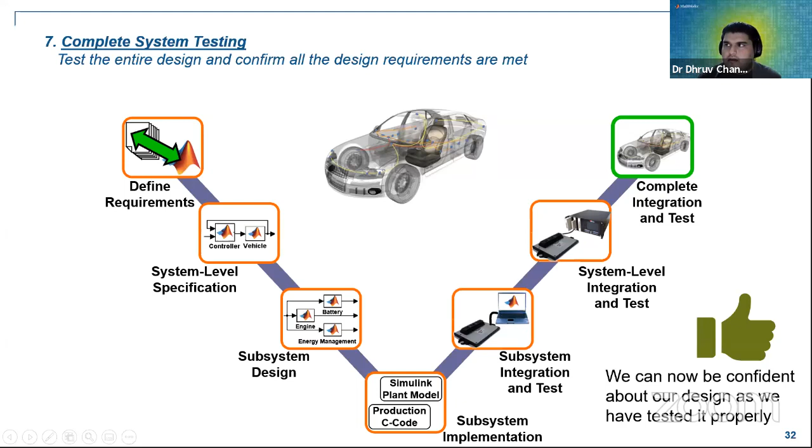So in summary, what we do in model-based design is make a system-level simulation model which mathematically describes complex behavior. This treats the model as a single source of truth for capturing requirements. There's nothing on paper, nothing in files, it's all in the model. If it's not in the model, you can't be blamed for it. All the teams have to work together on the same thing.

It provides a solution for how you work with multi-domain subsystem modeling. And because you're continuously testing and verifying it, your whole process is more likely to be successful. Finally, you automatically generate the code from whatever designs you've come up with. So model-based design covers all of these areas.

I know most of you might be students, or working in just one area, doing just the modeling process for one thing. But it is good to have a perspective on how systems are put together, because the entire world is now moving towards systems engineering concepts. So if you want to train for the future, start thinking about how you can develop system-level simulation models. I'll tell you more about what industry is looking for in students, just after this bit.

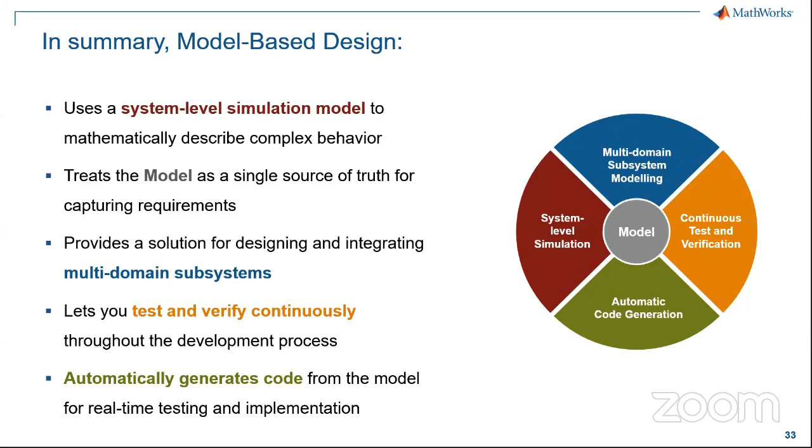Does model-based design leave other product development tools like FMEA redundant, or should we still practice them to ensure a safe design?

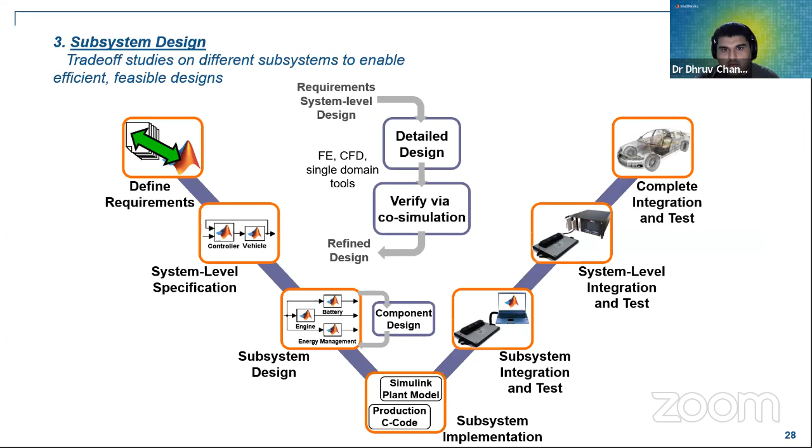Good question. As I showed in the step 3 here, you should definitely be learning all the important tools of your domain. So model-based design is a method to engineer the whole system, but you still have to learn the single domain tools for modeling each part of your system. If you're a materials engineer, you have to understand how the rubber in this tire is going to deform at high speeds, which means you have to learn the tool of that area.

I used to work in wave energy, that's what my PhD is in. I used to model the waves in the water using a particular tool other than MATLAB Simulink. I'd get the outputs and put them into my simulation, so I could model if a wave of this much height comes into my system, this is how much force will act on it. My simulation told me these are the forces on your mechanical design. I'd take those forces and put them into something like ANSYS, which would tell me if the structure can take that much force.

So you're still working with two, three, four different kinds of tools, and those tools are feeding data to each other. The point is that the system-level model will be able to see everything. It's like a monitor which can see everything, and you still co-simulate with all the other tools. Does that answer your question? Yes sir, thank you sir.

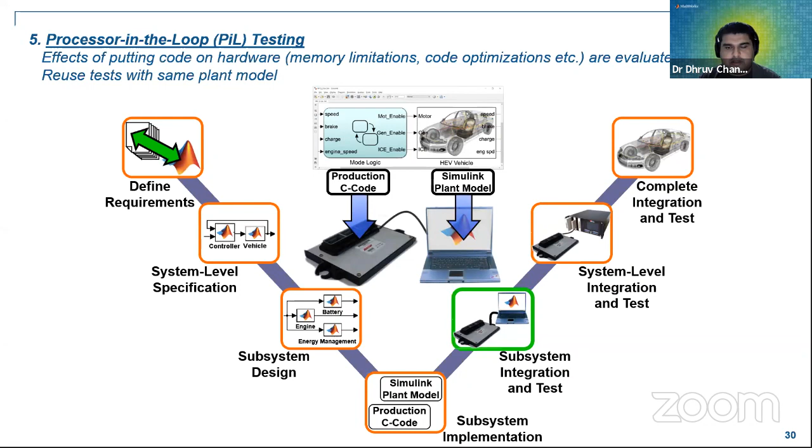Okay, so I'll tell you a little bit more about how you can do modeling in particular, because many of you might not be aware. Let me skip forward through this. So modeling and simulation lie at the heart of model-based design. Let's quickly look at a few things you can do with MATLAB and Simulink in particular. I'm not discussing other tools here because my knowledge is limited there.

So there are fundamentally two different approaches for modeling dynamic systems: first principles modeling and data-driven modeling. This is not a binary on-off switch, it's more like a spectrum. If you do pure programming, modeling differential equations and block diagrams, using Simscape language or symbolic mathematics, that is all called first principles modeling, because you have some equation, and based on your first principles of physics or mathematics, you model that equation and see what outputs you're getting.

If you're using other third-party tools, that will also go here, as another separate category, because those tools will be using partial differential equations or some understanding of material science to come up with some answers.

On the other side, we have purely data-driven modeling. So if you have some laboratory data, if you have some test rigs, you can take measurements and then you can fit those measurements to some curves, and those curves give you a rough idea of how your system is behaving.

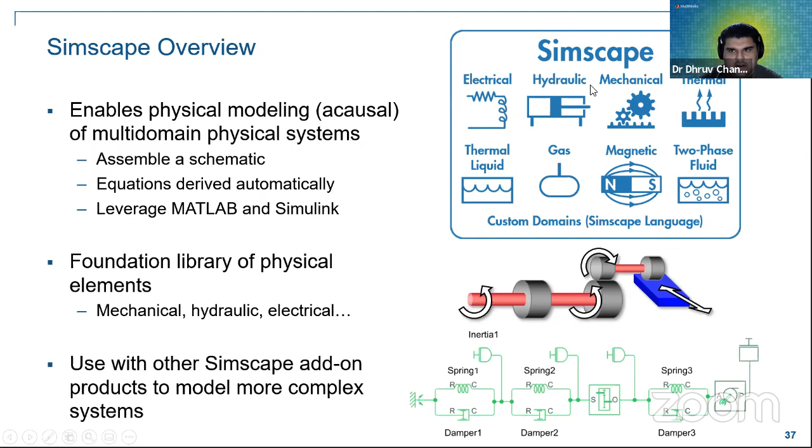And there are advanced libraries for doing more detailed things. So there's a library for power systems for modeling three-phase networks, electrical networks. If you want to model electronics, which is MOSFETs or other kinds of semiconductors, power electronic circuits, you can use Simscape Electronics. If you want to work with fluids or hydraulics or vapor or two-phase fluids, you can use the fluids library. Multi-body I'll talk to you more about.

This is for modeling joints, frames, bodies, etc. And driveline is there for automotive applications. So it has gears, lead screw, clutches, tires, engines, etc. So suppose you want to make a system level model of a car, you don't have to understand each part of this. You basically make a rough model of a car using the driveline library.

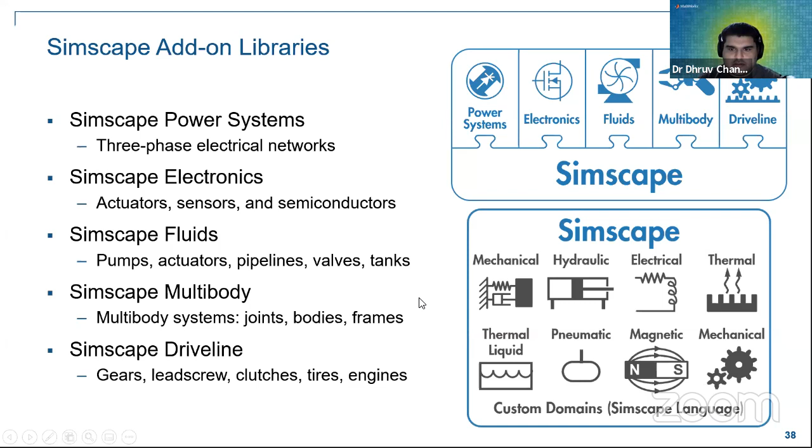And then whichever part you're interested in, you go into that part, and then you can use your specific, detailed domain specific tool to work on that and still be confident that you're coming up with a realistic design. So this will give you something like 80-90% accuracy, and with your tool you can go up to 95-98% accuracy. So it's very robust. It's a very good approach for modeling complex systems.

The multi-body one is very interesting for mechanical engineers. All of you, or most of you, are from mechanical backgrounds, so that's why I'm mentioning this. What you can do is, I'll just show you. So if you have a CAD software like this, let's say I'm using SolidWorks here, and you have to build this assembly. So this is a hydraulic lift platform. You have these linkages, and you have a hydraulic piston driving these linkages.

Now, why is a systems engineering approach important here? All of you are materials engineers. You can run some ANSYS program for this beam, right? You can check how much this beam is deflecting and all that kind of thing. But actually you can't get the right value of how much forces are being applied on these end stops unless you know how much load is sitting on the top, unless you know how much friction there is in this motion, and at what speed the hydraulic actuator is moving, right? Because how fast this accelerates is going to change how much force there is on this joint.

All of you mechanical engineers, I hope you will appreciate this. If you just put 10 kilos on top of this, it will apply 10 kilos of force, or 5 kilos because there are two of them. But if you take the system and you start pushing upwards at a high velocity, then the pseudo acceleration force, the inertia, will add some extra forces on this joint. So doing the system level analysis will let you understand what extra forces there are on this beam, and then you can go and refine the design using whatever software you like.

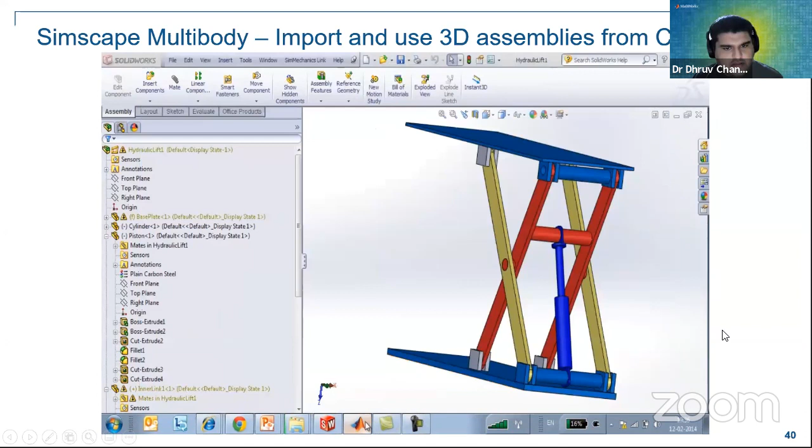So you can see all of these are solid parts or STL files. If you want to import this XML file, you just type smimport hydraulic lift 1. And we can specify the model name should be the same, hydraulic lift 1. You hit this in MATLAB, and in one line of code, you basically get an assembled system level model, which looks like that. It's all connected together. All the joints, all the constraints, everything will be modeled. And if you run this, you'll be able to see a 3D animation as well.

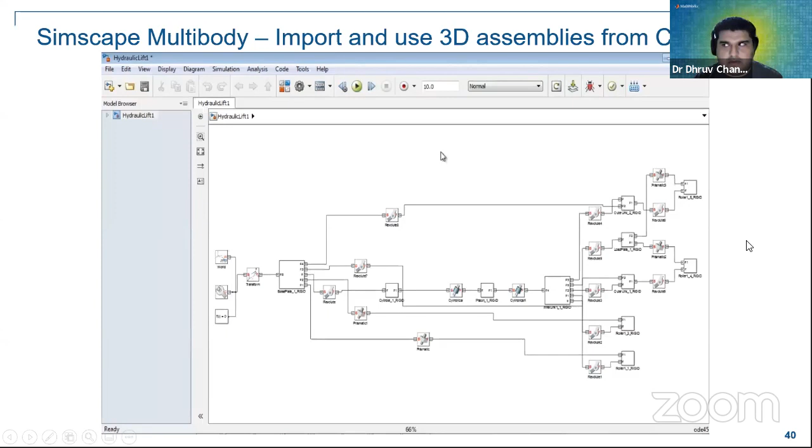So now you can put in whatever force you like in your piston, for example, and then do the further analysis. So as you are from a mechanical materials background, I thought this might be interesting to many people. Right. So that's for physical networks.

The other side, if you want to work with data-driven modeling, there is end-to-end support for machine learning and deep learning. So you can access data from your files, sensors, databases, etc. You can work with big data. You can clean it up. You can clean up the noise. You can extract the features. You can develop models. So if you're working in machine learning or deep learning, there's a lot of support now. I think it's one of the easiest platforms to work with.

And then you can, again, put this as part of your code in Simulink, or you can develop apps, or you can push this code to embedded devices. So this end-to-end workflow is there. If you want to start off with this, just ask me the question. I'll tell you where the on-ramps are.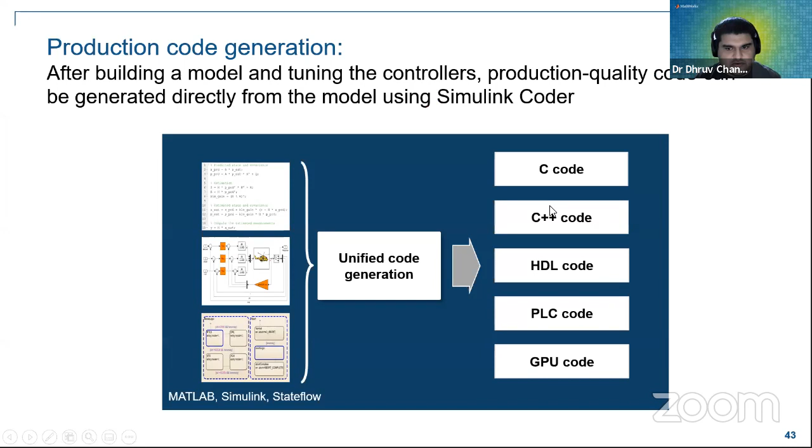And all of the things that we've talked about today support production code generation. So if you can do the modeling and simulation part, forget about all the rest of this. MATLAB will do this for you. So your C, C++ code generation, HDL, PLC, GPU, and it works just fine.

Okay, so therefore we can use both first principles and data-driven models for our system. So in summary, these are all the things which you can do with MATLAB and Simulink: multi-domain modeling, which we've been talking about mostly, but also parameter estimation, control design, automatic code generation, working with big data, optimizing your designs, AI, and then integrating it with your enterprise systems. So these are the three things which we briefly talked about today.

Okay, finally, what is industry looking for in new students these days? As you all know, there's a lot of economic turmoil now, and the job market is very difficult. I'm not going to lie to you. So if you're interested in getting a job, industry is looking for more depth and breadth, more conceptual understanding, and knowledge of industry-relevant computational tools is essential nowadays. Just knowing the theory is not enough. You have to know how to apply these skills as well.

So a little bit about control, a little bit about verification, validation, software stuff, which we've been talking about today, and experience with complete projects and products, not just silos of theory. These things will greatly improve your odds of getting a good job and then having a great career afterwards, because for silos of theory, we can get specialized software now to do almost everything. It's the complete top-level view which is adding a lot of value.

And finally, the ability to work with teams. So your soft skills, how you talk, how you interact, how you work with each other. If you can find a few projects, work with a few teammates from different domains, you will end up acquiring a lot of these skills, and there will be a lot of value to you in your studies.

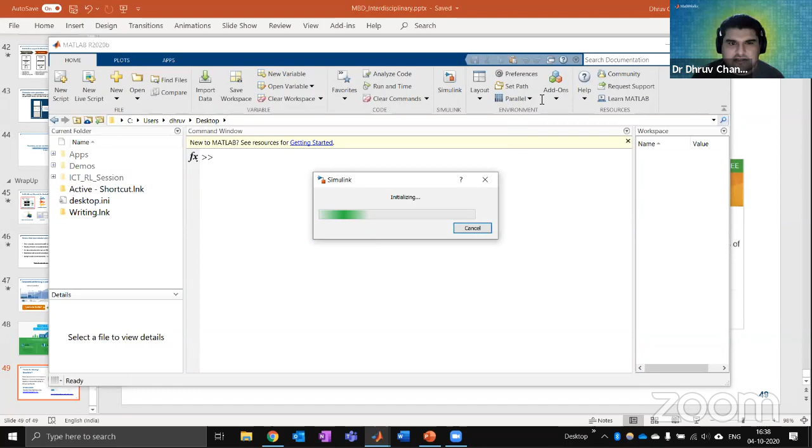Yes, sir. And how can we link FEA tools like ANSYS and flow analysis with MATLAB, sir? You can go and check the documentation. So ANSYS, I think, already has some form of integration. I know COMSOL definitely does. All of these, if you're working with a well-known software package, they will typically have a MATLAB interface somewhere. And of course, you can always just export your data, and then you can have like a lookup table.

So let's say from ANSYS, you have a table of deflection versus force. That is a two-dimensional table of data. You can just import that into MATLAB as an array, and then your Simulink model can read how much is the force, this much will be the deflection, or the other way around. So all of these softwares will typically have links. Yes, sir. Okay. Let me show that questioner's question because it was quite a good one.

So this is Simulink. You basically drag and drop blocks from the library browser into this interface. And if I go to Simscape, you have a bunch of libraries here. So we have in the foundation library, let's say, a bunch of mechanical components. So these will include things like your angular velocity source, force source, torque, etc. You will also have spring, damper, mass, fixed surface, etc.

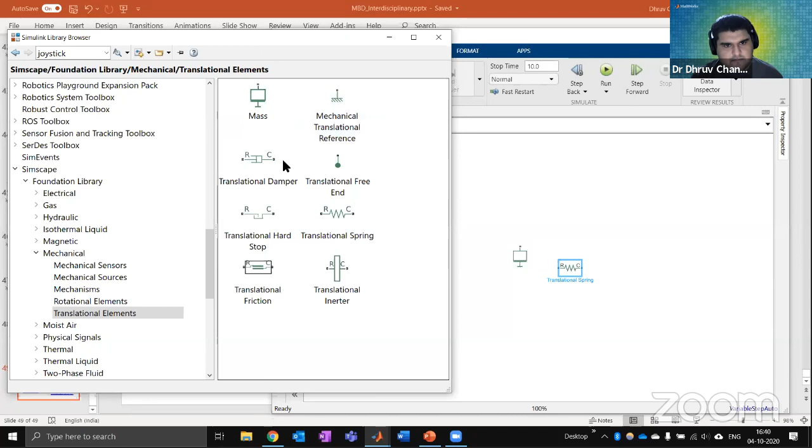So I think the question was about, was it about a damper? Yes, sir. How can we import the springs and dampers? Springs and dampers, yeah. Okay, so I'll start with a mass. I'll put in a spring and a damper. Okay, so let's say that my mass is here. It is connected with the spring and damper system. I mean, this is just how you draw diagrams in class also, right? And this is connected to some fixed surface at the bottom. Oops. Okay, so that is a suspension model.

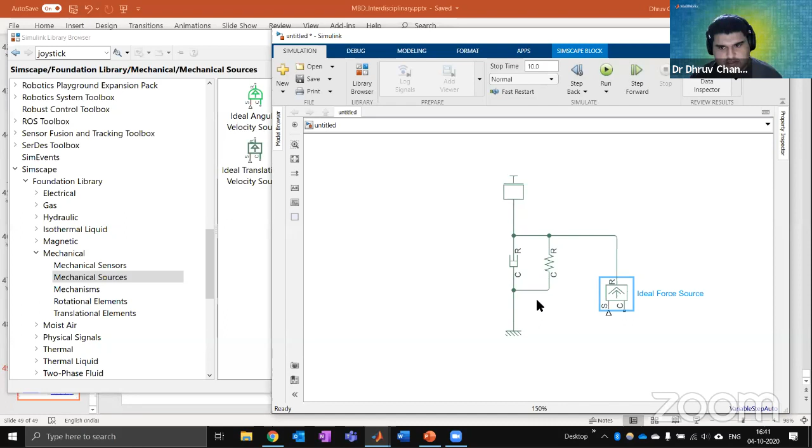Now what we want to do is we want to put in maybe some force. So if the force is coming from the road, it will come down here. If it is on the body, it will come from up here in the network. So I go to mechanical sources and I'll put in an ideal force source. Maybe I'll put it from the bottom as if it is coming from the road side. No, actually this won't work. I'll have to put it here. This is because this part is connected to the ground, so you have to do a little bit of additional fiddling. I don't have time for that.

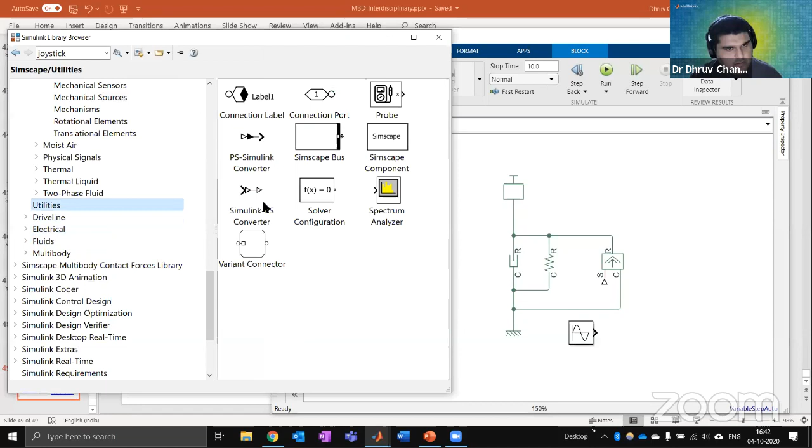And then you just use something like, let's say, a sine wave block. So I take a sine wave and I convert it from a Simulink signal to a physical signal. Sorry, I'm just trying to find the right block here. So I take some sinusoidal input, force, I feed it to this force block, and then maybe what I want to do is just get a measurement of how this mass is moving.

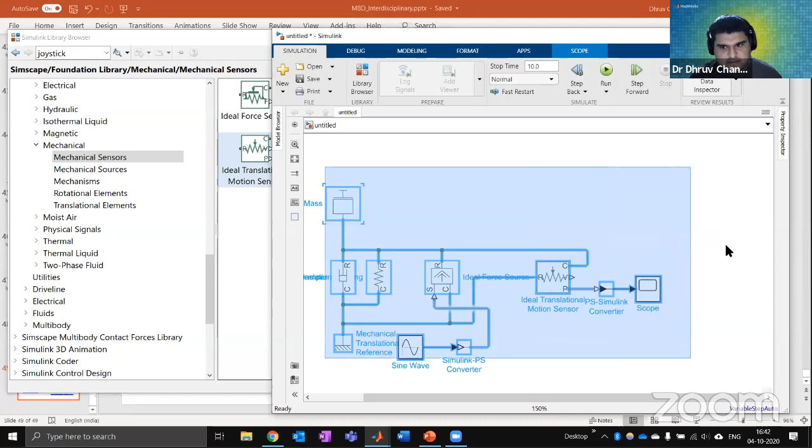So I'll get one of the sensors, maybe an ideal translational motion sensor. I'll connect it one side to the top, one side to the bottom. And then in the scope, I can see how my system is going to move. Let's see the position of this, and I'll put that in the scope. Okay, that's it. That is a virtual test rig for a suspension. You can change the force from down here. You can go into the damper, and you can change the damping coefficient from here.

If you just double click on it, you can double click on your spring, and you can change the setting here. The code is all viewable. So if you click on source code, it will actually show you what code it is taking into account. So force equals spring rate times the displacement x. That's it. That's just the equation.

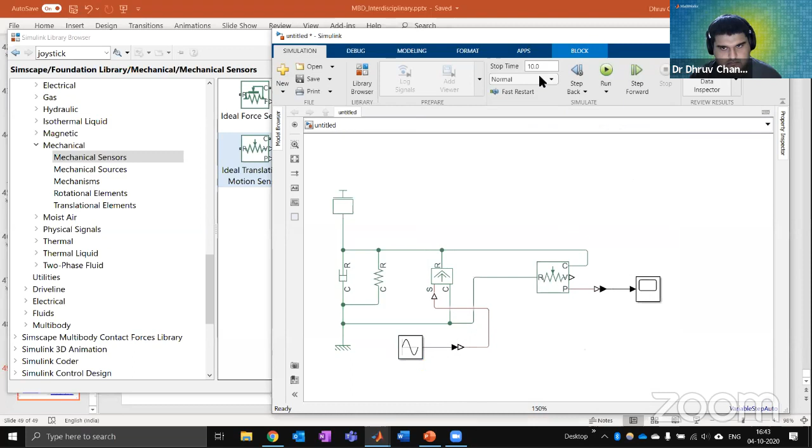There. Let me put some displacement on this. Maybe displacement of 10 at a frequency of 1. And I'll run this for 100 seconds. Let's just see what happens. I've never built this before, so I have no idea what's going to happen.

Oh sorry, I forgot one block. You have to put a solver with this. This solver tells you that it's an equation which has to be solved in a particular way.

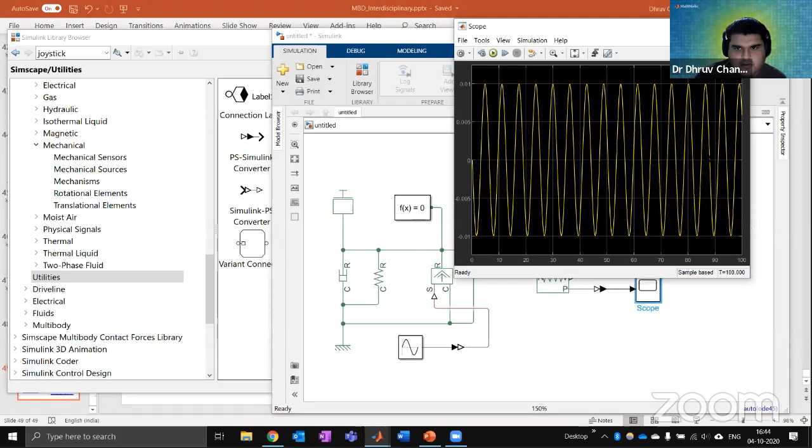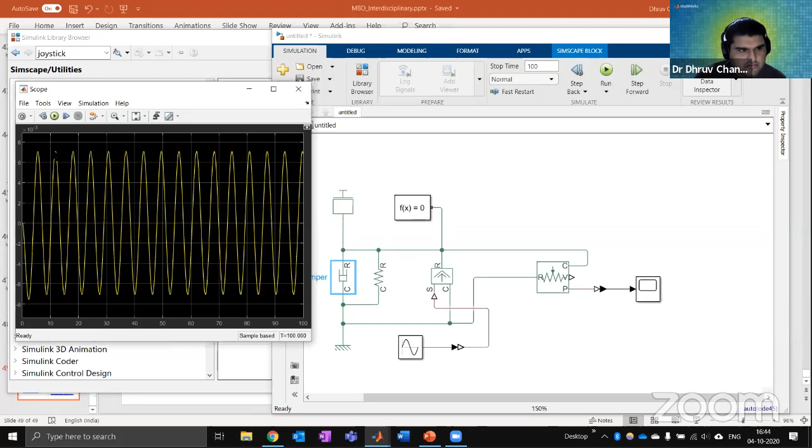So I can now check that with this mass, with this damper, with this spring, this is the kind of displacement profile I'm going to get. It's plus minus 0.01 meter, which is 1 centimeter deflection. Now I can make my damper stiffer, 10 times harder, and run the system again. Now it's a much smaller deflection, like 0.8 centimeters or even smaller. So like this, you can change various aspects of your system and make very complex systems. You can model a whole airplane or a whole car and model everything about it. Once you develop the skill, it becomes much easier.

I hope that answers that question. Yes sir, it also answers the follow-up question about how we can input the parameters. There is one last question: where can we find some examples for electromechanical simulations in MathWorks?

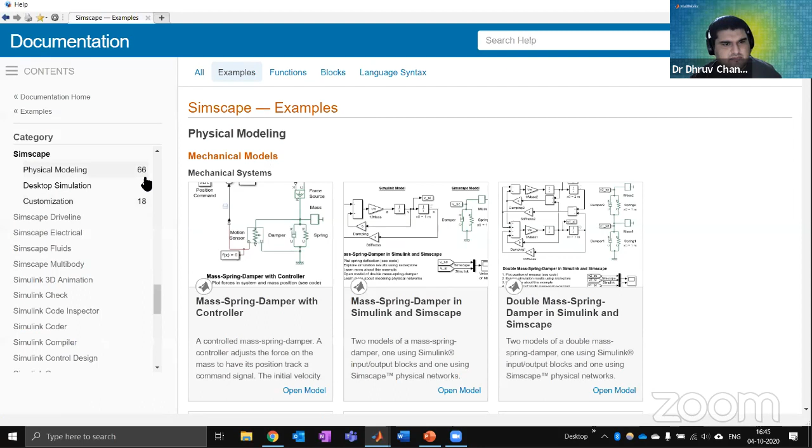If you just go to MATLAB and type doc simscape — doc stands for documentation, and this is publicly available on the internet as well — it will open up the Simscape documentation. If I click on examples, you'll see there's almost 100 examples, just under 100. So let me find some electromechanical system.

This is like a permanent magnet DC motor. On one side there's an electrical circuit, in blue, and on the other side there's a mechanical circuit. Here is one with thermal and electrical circuits, and we can find more probably down here. So here is a solenoid with some magnetic blocks — you apply some voltage in this coil and it generates physical mechanical force. So you have electromechanical models, and you have hydraulics, connecting fluids and mechanical systems, etc. There's a whole bunch of this. You can just go to the documentation and see.

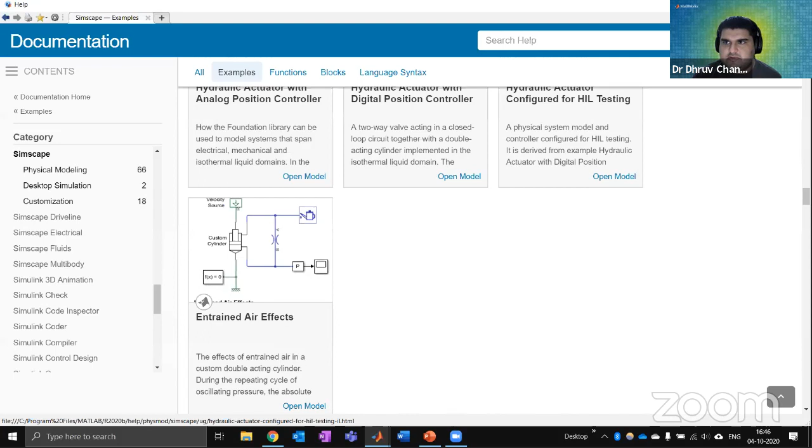Okay, I think I'm out of time. I don't want to eat into my next person's time. So, yes sir, yes sir, all the questions have been answered.

Now I would like to switch to Reynolds sir for a vote of thanks. Thank you so much. Thanks, Dhruv sir, really thank you. We are really grateful that you accepted our invitation and delivered your session in our workshop. I know how busy your schedule is, and we thank you for taking out your time and coming and sharing your expertise with our students. You have already been to our campus and your team is really great.

You have taken us on a journey into how R&D is done in different firms. It will be a very good eye opener for all our students who are aspiring to join these firms and contribute their skills and knowledge to society. The case study of system design on electric vehicle — you really explained it extensively. The information, your presentation, and the depth of information you gave was really inspirational. Once again, in the last 5 minutes, you showed us how dedicated and sincere you are by immediately going to the software and developing the code. Once again, you have easily exceeded our expectations, sir, I can really tell you that.